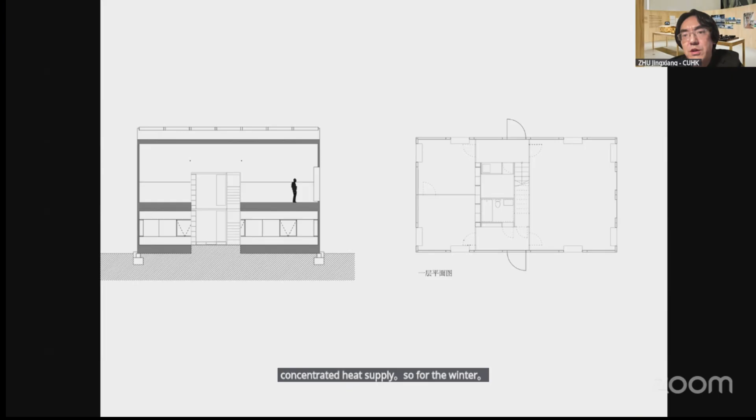This is very important in winter because Suzhou is located in a very special climatic zone, not similar to Bangladesh; even Europe doesn't have it. We call this a hot summer, cold winter region. That area has no concentrated heat supply, so in winter it's super cold, minus 4 or 5 degrees, without a heating system. So we have to guarantee the whole building works very well passively, which means even without much internal heating, the building can still resist the temperature fluctuation.

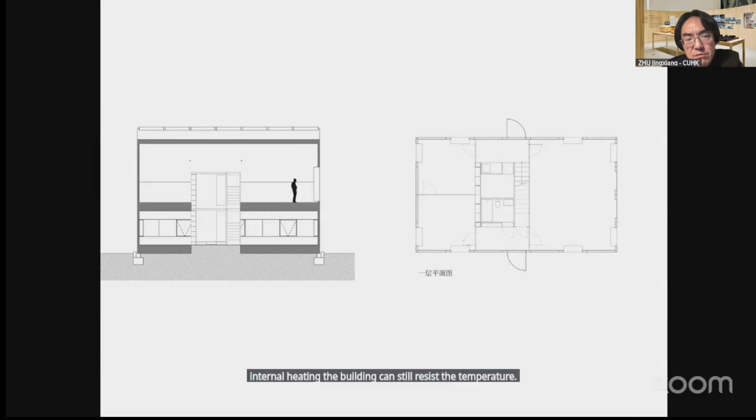So we designed a sandwich system, which means we have cladding, we have thermal insulation, we have fireproofing elements. We hide all the structure in between, so we are not exposing the high-density skeleton to the climatic shock. Inside, we have very basic, beautiful ornaments. For example, we use diffuse light, so it's very warm in daytime and also in the evening time. We have a huge window facing the village and can overview the beautiful sunset.

And even for the cladding, we made a very tricky solution. In the morning, when the sun rises, the air inside the cavity behind the cladding will be heated up, and it will flow to the upper level. And we designed a series of operable panels. So we teach the user in which situation you should open them and allow the warm air coming in. But in the summertime, you should always close them and not allow the heated air to enter the space. So this one was very effective.

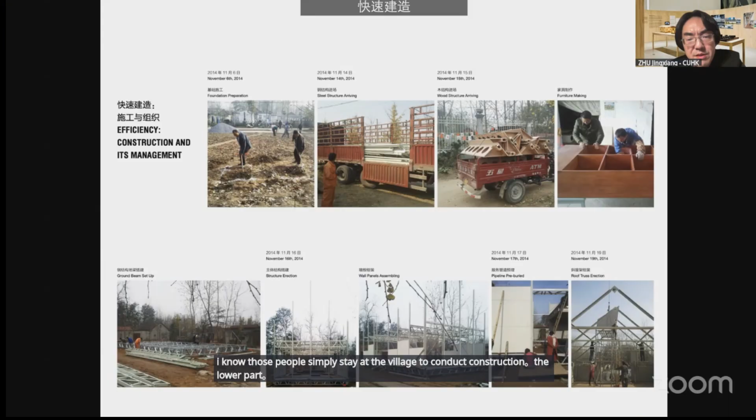So the first part is about how we organized local farmers, peasants, or those people who simply stay in the village to conduct construction. The lower part is about the assembly of the skeleton, and the upper row is about the erection of the skeleton and the internal insulation panels. The lower part is about the outside cladding after we install the waterproofing membrane material.

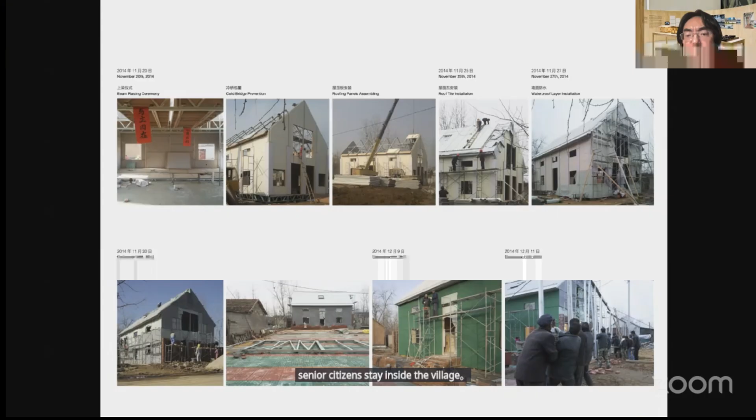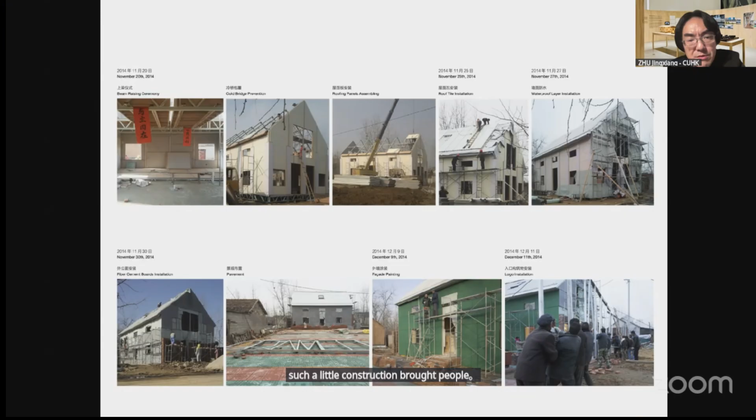So the bottom right photo is very impressive because we organized all the senior citizens staying in the village, because normally in wintertime they do not have any job. They can do nothing. They cannot go outside to earn money. So such a little construction brought people together and delivered funds to them. So this is a collection of all the workers from the village.

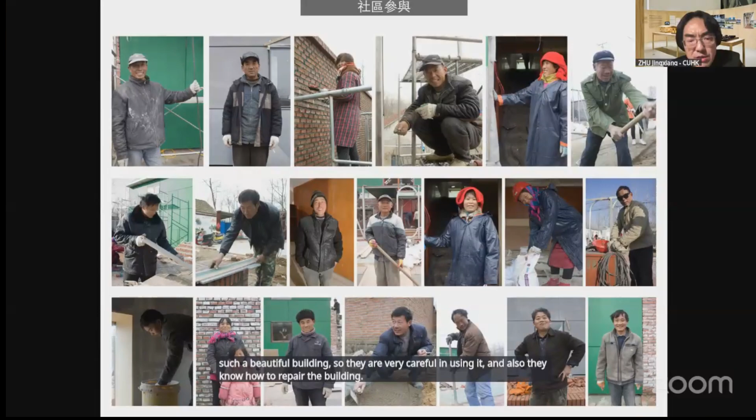And because this is a building built by themselves, they feel an emotional bond with such a beautiful building. So they are very careful in using it, and they know how to repair the building from the internal part to the external part. So the building has already stood there very well for more than 12 years. And every 3-4 years, we send assistants to check the building, and the situation is quite good.

And in wintertime, the whole village, the women and children, have a place to take a shower inside this very warm space. And this is a monthly meeting, very successfully organized by following the Muhammad Yunus Grameen Bank pattern.

So after this prelude about how I became engaged with Bangladesh, I try to summarize my team's working pattern and how we developed a very special philosophy and methodology from this working pattern. So the first chapter is about from crisis to project. Because we are working inside the university, we are not compelled to solve the problems inside society. We have to foresee some problems and prepare solutions.

And as a university institute, we cannot do large stuff. And we do not have enough manpower. We can only organize a team of 6 to 12 people. So we always ask this kind of question.

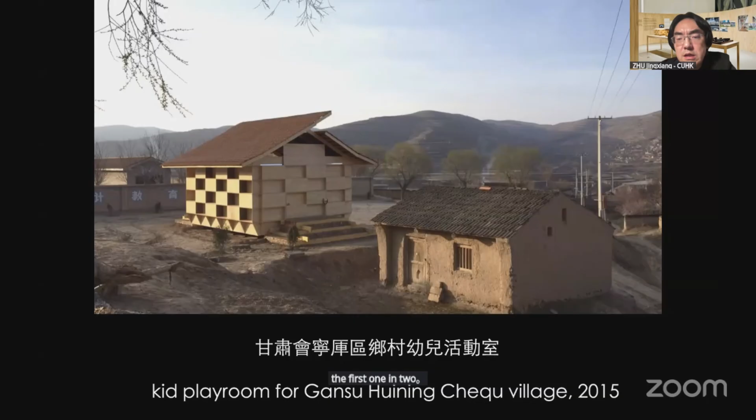So here I mention several very agile projects. The first one: in 2014, a group of NGOs came to me. They said, Professor Zhu, you know, in the past, China had a so-called Hope Project. Many charity groups received money. They tried to build gigantic schools.

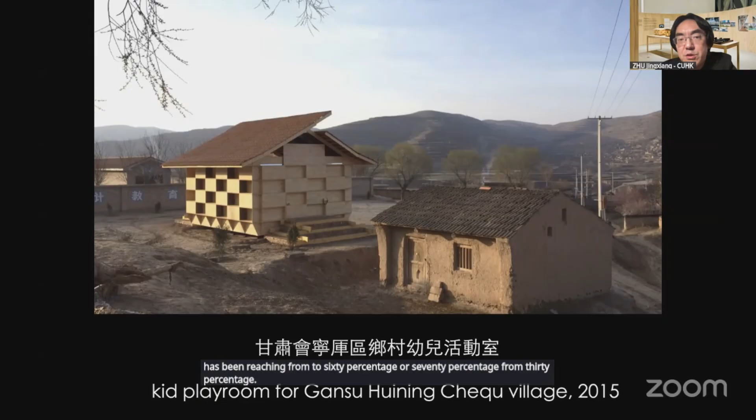But after China entered a period called radical urbanization, so much population moved from rural places to cities. And the urbanization rate has gone from 30% to 60% or 70%. So that's a huge number. So there is a kind of phenomenon. A lot of youngsters, children, kids, were left behind, and they live together with their mother and grandma, grandpa. So they are lacking qualified education preparing them to enter the city environment.

So charity groups are working hard to help them. They often send NGO teachers to the village, but villages often have rammed earth buildings or brick buildings, not very qualified for new types of education. So they asked me, is it possible that we can help if they raise funds for each village? So the budget is super, super low.

I found one very interesting thing. I said, okay, even if the budget is low, it's fine. If this type of work has quantity, we are interested. So from this aspect, we tried to work with them. I asked for very little money, which could cover my assistant's three months of work. Then we tried to deliver the first playroom prototype to them. This was in 2015.

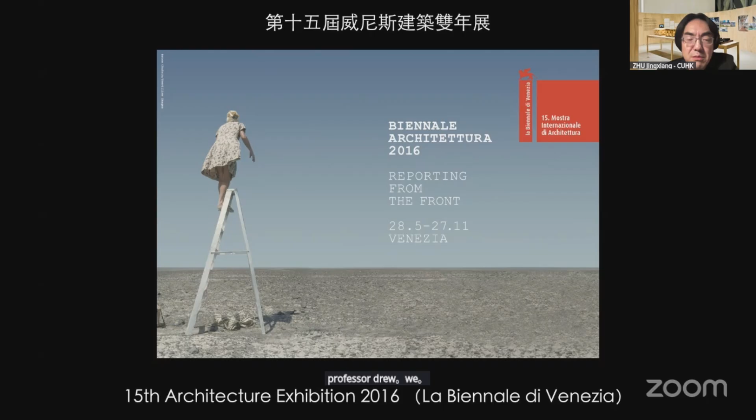So such a story was spread out, and also the next year, before the Spring Festival of China, we were invited by the curator: okay, Professor Zhu, we were impressed by your checkered playroom. Is it possible you participate in this exhibition? We said it's fine. If it's just a model, we can send the model to you, and simply tell us when we need to catch up with the cargo's logistic schedule.

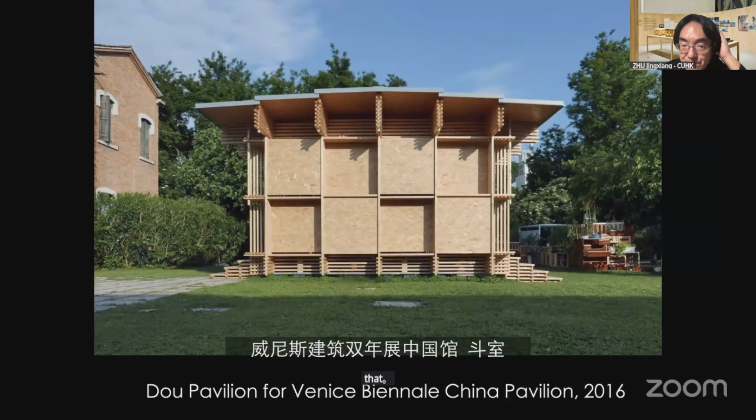But after several days, they asked me, okay, we have a huge garden, and the huge garden needs some gigantic thing. Can you ship one house to Venice? Then I was astonished because there were only 9 days to the Spring Festival. And everybody knows during the Spring Festival, the first 15 days, nobody will work, particularly the factory. So I had to make very special arrangements.

In 9 days, I wrote multiple letters to big companies. Okay, we need such kind of help. Which company can make a decision very quickly? Please sponsor this project. So very luckily, we got a reply in 7 days, and we raised funds, and in the first 15 days, I myself did not spend any holiday, and I made a design. I made some new changes to adapt to the summer climate of Venice.

And after 15 days, workers went back to the factory, and they started to produce, manufacture, and assemble. Then after another 20 days, the building was completed and successfully assembled inside the factory. And we very quickly went there to make a check. After midnight, the check completed, and immediately the building was dismantled and packed to send back to the harbor of Shenzhen to do customs clearance to catch up with cargo boats.

So after another 2 months of transportation, in May, we successfully exhibited this Dou Pavilion for the Venice Biennale. On site, we also used such kind of method. We fold many components, and on site we unfold those components. We link them, and we insert panels to stabilize the whole frames.

And Dou in Chinese first means a measuring tool, but also means a fight or conflict. But sometimes we also use this word to mention fun, like when we call 斗牛, bullfighting, or 斗蛐蛐, letting insects fight against each other to make fun. So later we found this is an interesting meaning with multiple layers, multiple folds. So we try to use this one to emphasize our philosophy. We welcome conflict, we welcome challenges, we welcome crisis. After we can solve it, after we can successfully transform it, it will bring a lot of fun and pleasure to people.

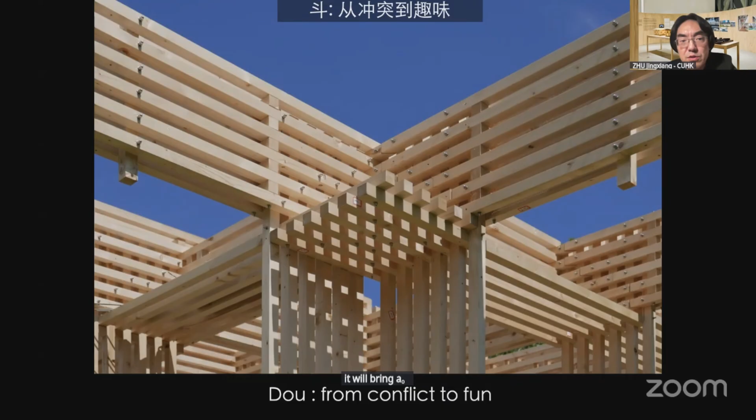So German kids invented their own game because the module is 1.2 meters, and they want to chase each other, to see which one will first successfully climb one round without falling down from the building. A lot of big masters, 2 Pritzker winners were inside, and also the most famous Chinese architect, Ma Qingyun, and the MIT former head and the current Hong Kong U head were inside. So this is another case showing how we deal with exhibition requirements and make the building be generated from another crisis of time.

Next project is in Kenya, and this is called Mathare Beijing School. It is located in Mathare Valley, a kind of informal settlement or slum area. China has a merchandise association continuing to support one of the schools inside this slum area. We were invited to make a little bit more formal building, and finally we delivered this white building.

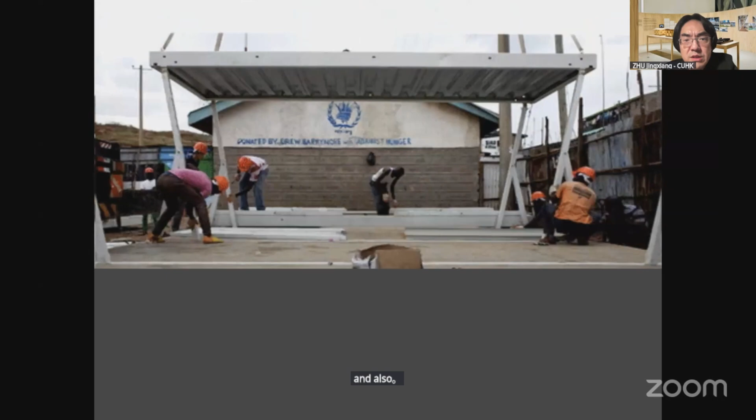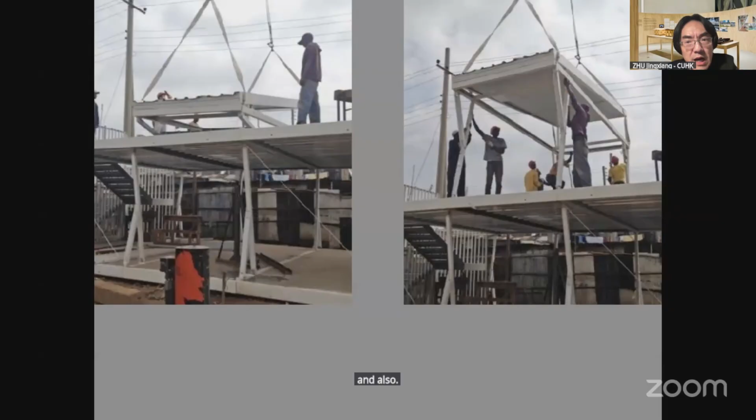And we invented the frame system, and everything can be put inside the container. After they are moved out from the container, we can use one crane to lift up, and local workers only need to plug in those long bolts and fix it. We only hired one group of Chinese workers from the local market who can operate the crane. All other workers we hired from the slum area.

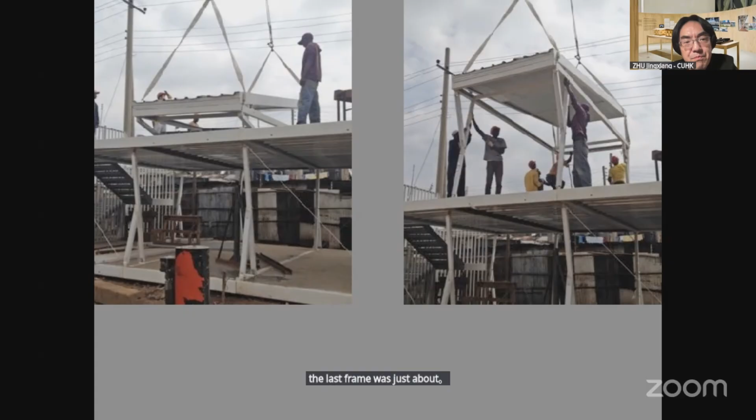And most of them are the parents of the families of the school. So in the beginning, the first erection of the frame took about 2 hours. The last frame was just about 5 to 10 minutes. So in 5 days, we realized this framework.

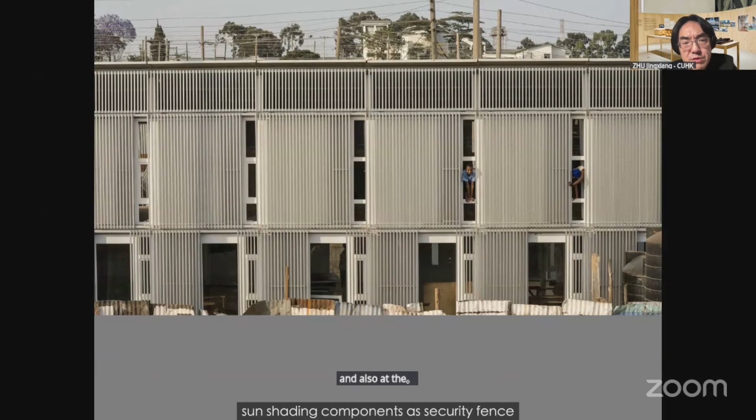And also after the framework was finished, we simply assembled the wall, and also outside the wall, we assembled sun shading components of aluminum. They are also serving as a security fence, and they have a much higher quality, but they also have a similar formal language with the slum areas' informal buildings. So in this way, we can identify this is a well-designed building, but they are not creating segregation inside the neighborhood.

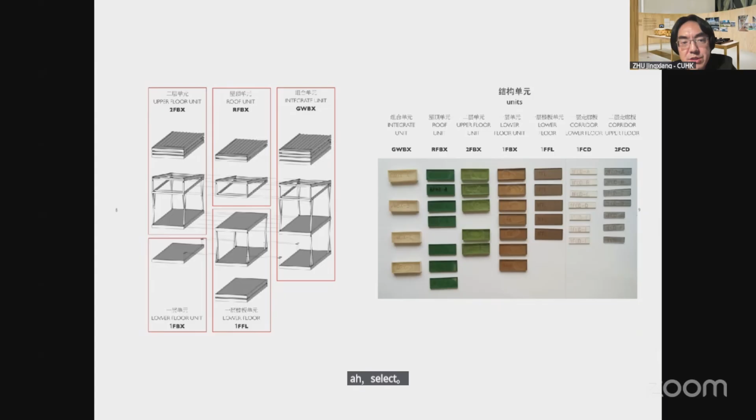And also the left one is 5 types of the module we have designed. Right-hand side is a kind of graphic language we have designed for the local workers, because we can hardly tell them this abstract alphabetical name. We simply let them understand green, like dark green, lighter green, or a brown, or a very light brown color. So they can help us to select which type of components from the heavy piles.

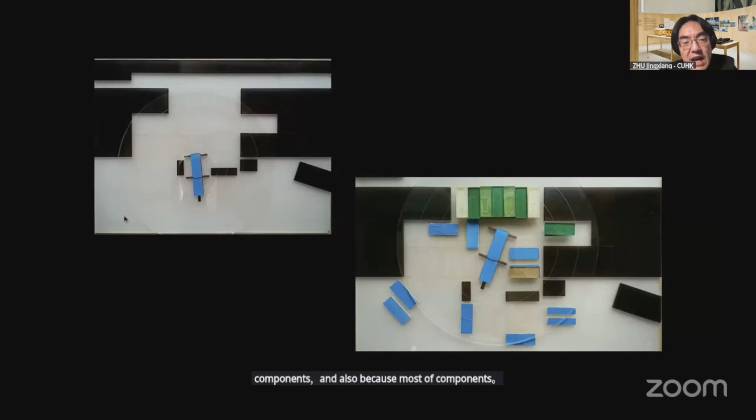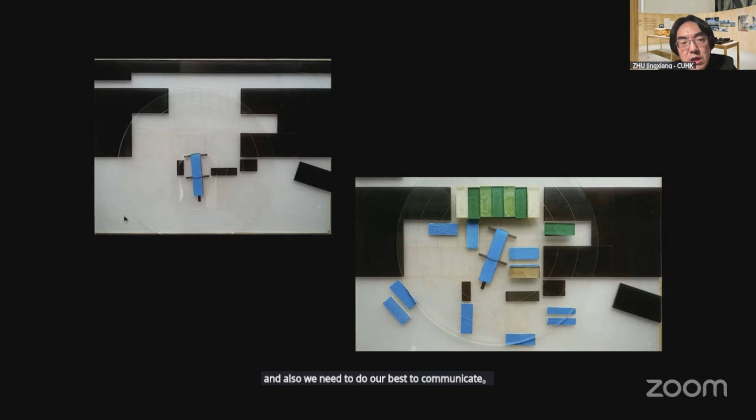And also here, we also have some animation showing we very well planned those kinds of cranes. And also for the crane, there is a formula controlling the arm's cantilever spanning distance with the weight allowed to lift up, right? So we have to follow such kind of formula, and also very carefully distribute those kinds of components. And also because most of the components are relatively heavy, from 200 kilograms to 500 kilograms, we need to do our best to communicate among the team to prevent accidents or disasters happening during the construction.

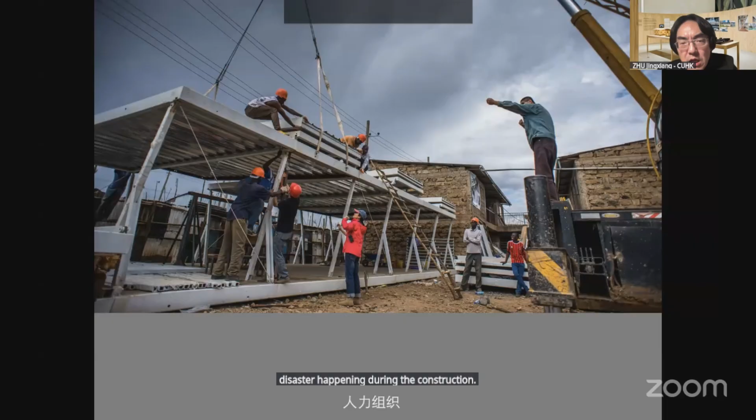So here you can see we also sent 2 people as assistants there. And also a very important lady is the lady in red. She helped us on collecting a lot of on-site information. And she helped the assistant we sent from Hong Kong there to complete the building. And finally, she also used this case in her PhD, mentioning how a group of younger architects managed to contribute something to this slum area.

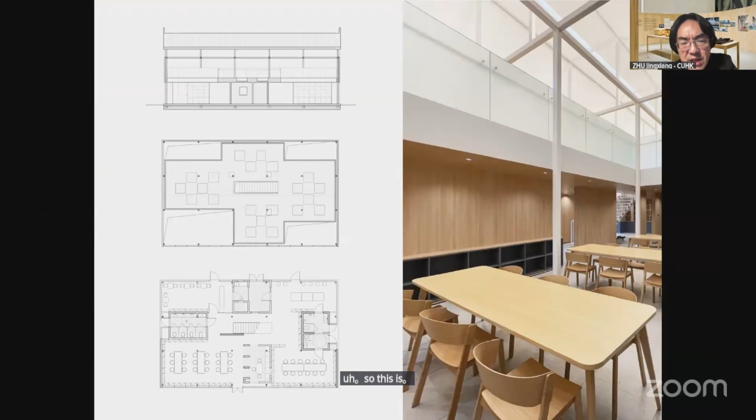And also China made a great urbanization leap forward, and many new towns were constructed in suburban areas. But the government has to deliver, for example, public toilets, garbage stations. So we also got a chance to work with the Henan Xinxiang government, and we wanted to turn the right bottom public toilet into a multiple usage facility. So finally, it was turned into a book house, and in the past, nobody wanted to get closer to the public toilets. At this time, everybody wants to use the bookstore. So this is a plan, section and also internal view. And after you go up to the upper floor, you see such kind of scenario.

So I quickly mentioned these 5 little projects. They are always a kind of response to crisis and special issues, either about the rural educational crisis or education inequality in Kenya or in a metropolitan city like Shenzhen. And sometimes we work with curators' requests to deliver an exhibition pavilion, or we try to enhance our community and turn a not-in-my-backyard facility into a kind of popular device.

But other than that, we also have another phase, because we don't just want to do one project after another project, and the whole universe needs a lot of houses. We can never fulfill such kind of need. As a university teacher, we also want to find a better way to turn a project into a qualified product. So there is a difference between project and product.

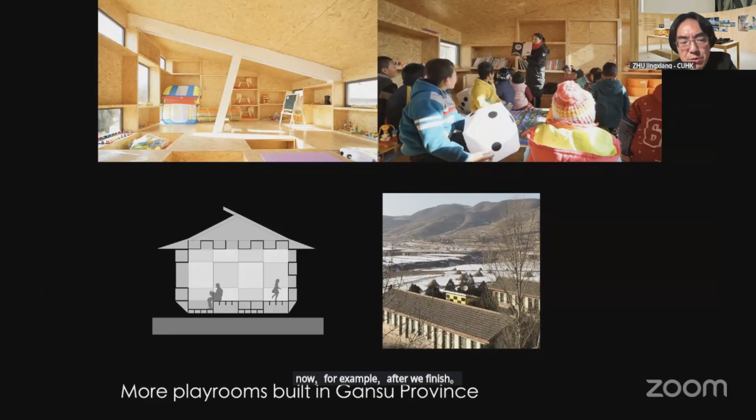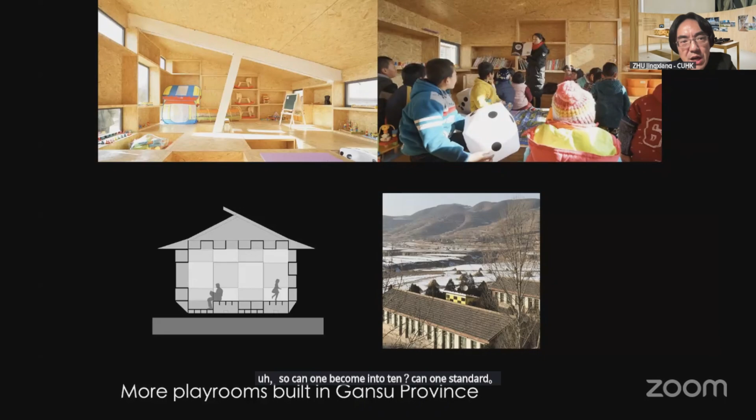Now, for example, after we finished the checker playroom, immediately the NGO asked us, okay, Professor Zhu, the first year we need 10. And different villages have different sizes, different populations. So can one become 10? Can one standard one become other types? So very quickly, we need to optimize the building design.

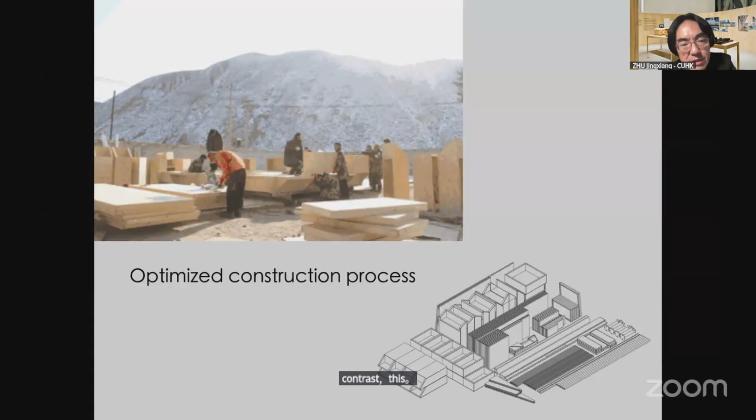And from 7 days, finally we compress this into 3 days: 1 day for foundation, 1 day for assembly, and 1 day for finishing. Everything can be packed into a truck.

And because we can hardly handle a large quantity of ordering, we work with a factory. We help the factory select the machine and select the material supplier, and we even help them build up a tiny engineering team, which gives them the different certificates that NGOs require them to prepare.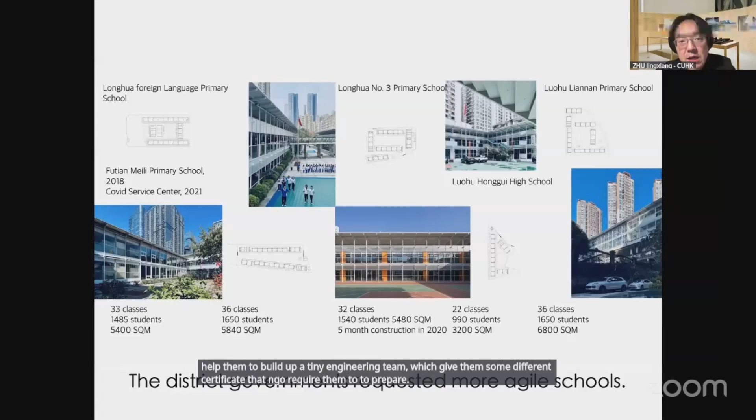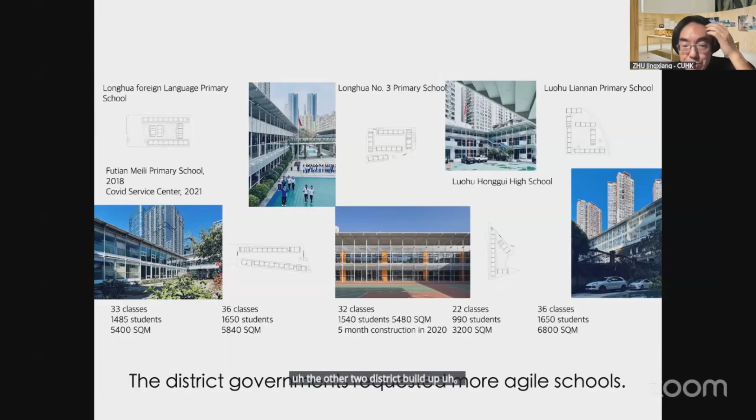With this factory's support, we also dare to fulfill other types of requirements from other districts in Shenzhen. After they finished the first school, everybody felt this might be an interesting solution. Each district needs certain numbers of new schools, so we took this as an opportunity and helped the other 2 districts build up the other 4 schools in 3 years' time.

Definitely, if we are able to turn a project into a product, we have to put a lot of energy into the innovation of system and joints. So here we use a very special type of framework, and also a platform construction method.

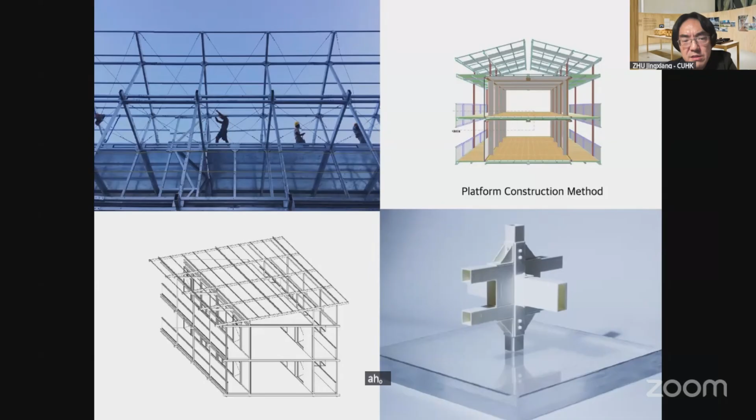This system allows manual construction. Even without a crane, this school can be built. The joint is a little bit special, and Arup gave us third-party final check and final approval.

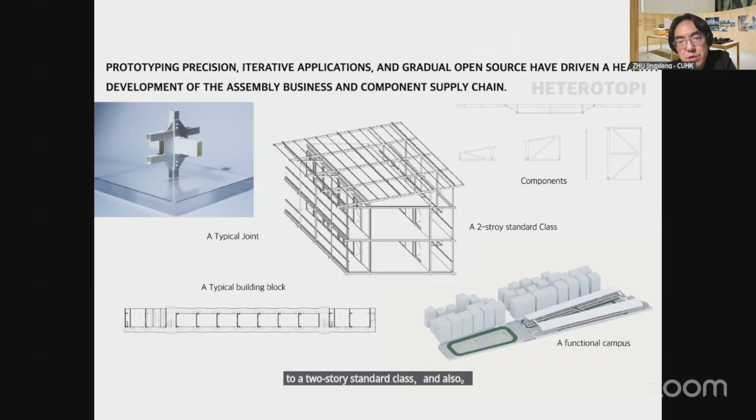And also we have to design everything with a system concept, from type of joint to a two-story standard class, and components have been reduced to a minimal number, and we can build a typical building block, and from building blocks we can build a functional campus.

So by looking at this very detailed drawing, you can see it's one type of constructional system but with a different spatial arrangement. For example, on the right-hand side, it's classroom, so we have a double-loaded corridor on both sides of the classroom. For kids, this is fantastic because you can slip from one classroom and enter into another, and you can walk around and have a very beautiful differentiated view on left and right.

With the same type of grid, we are able to adapt into very different functional usage. For example, on the left-hand side, you see how we arrange office, how we arrange a large meeting space, how we arrange a toilet. Even for toilet, we design 3 rows: one for male, one for girl, and the third one either for storage or for teacher, or for special gender, just in case there is a gender imbalance situation.

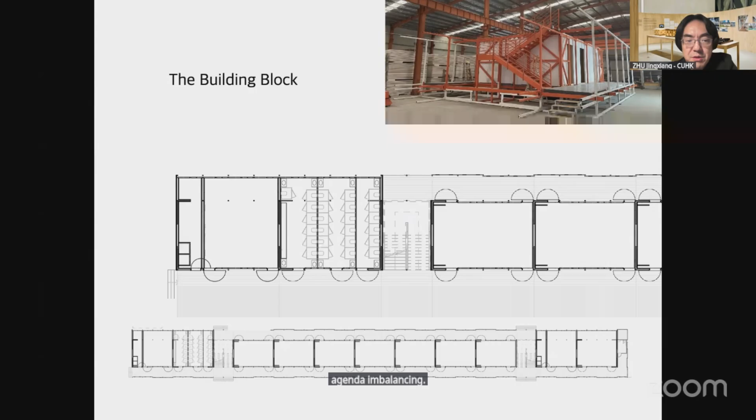Because we push this to the extreme, we just use a skeleton to do the expression. A lot of people felt, oh, this really revives our traditional timber construction heritage. And because the steel has no on-site welding, the galvanized steel with a coating is very, very durable.

So to make a summary, we are always very keen to see our projects being duplicated or requested by people for larger quantity. We have several methods, either through mass manufacturing or through open source manufacturing. For example, the Luohu school is not manufactured by the factory we are familiar with. The third method is always using one good prototype to do little variation, and we can always adapt into the change.

The last part is about the Agile methodology, because we can deliver things in a very quick way, so there must be some method. First method is about a very good spatial organization, and use the construction to determine the material, and use material to determine the structure. So it's no more a very modern way, but it's a very classic way.

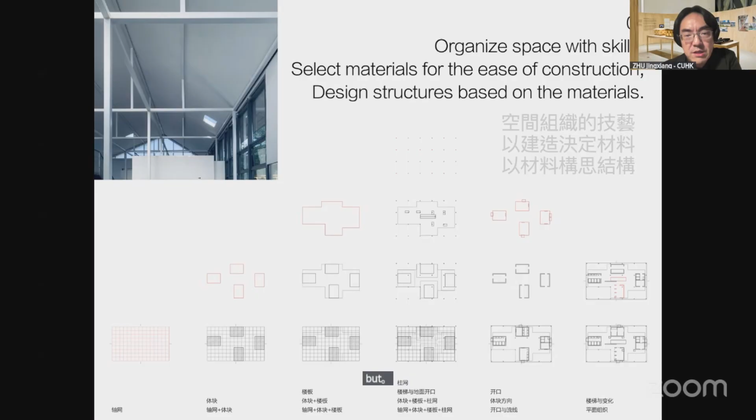For example, the left one, we decide to use slender or slim components which can be produced by laser cutting machine, so they are either 80 by 80 or 100 by 100 millimeter. It's very slender, and based on this material we decide how tall we can build, and what is the largest span without adding some truss or additional beam. So based on this grid, we build the whole pavilion.

And the second is about offsite fabrication. We are very careful on knowing the logistic condition and transportation tool, either made by animal or in the future maybe by drone.

Also our consideration: yesterday we just had a meeting with a Shenzhen company. We use a drone to aid the transportation of the concrete building. We are very curious about their story, so we interview them and try to accumulate certain knowledge.

The third thing is about lightweight construction. Normal building is about 1.5 to 2 tons per square meter for concrete buildings. So we try to push this to another direction.

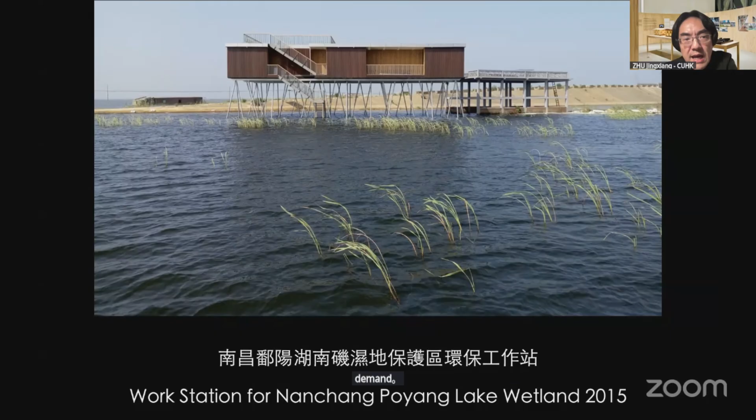This is a wetland workstation. This one may be very close to the Bangladesh demand. Annual flooding is about 3-4 meters of level difference. Any type of heavy construction will finally be destroyed by the wave and the flood.

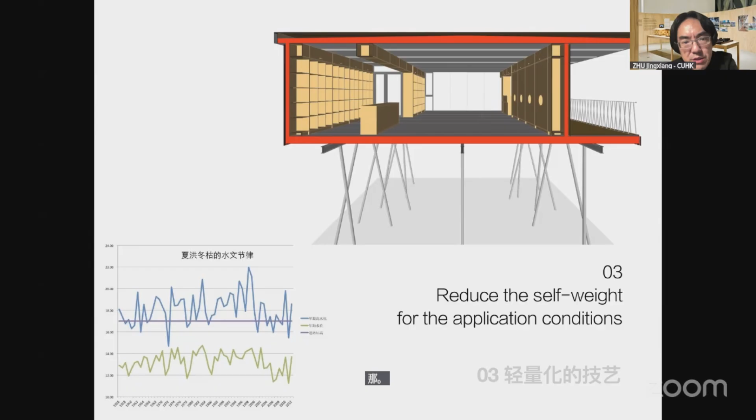So we designed a super lightweight structure - only 200 kilograms per square meter, but with a loading capacity of 350 kilograms per square meter. We also elevate everything and use furniture to do the structure. After we finish, the space is beautiful, but you're not allowed to move our furniture because they are supports.

Annual flooding is more or less like this, and this building has already survived there for another 10 years. During the dry season, it's like this.

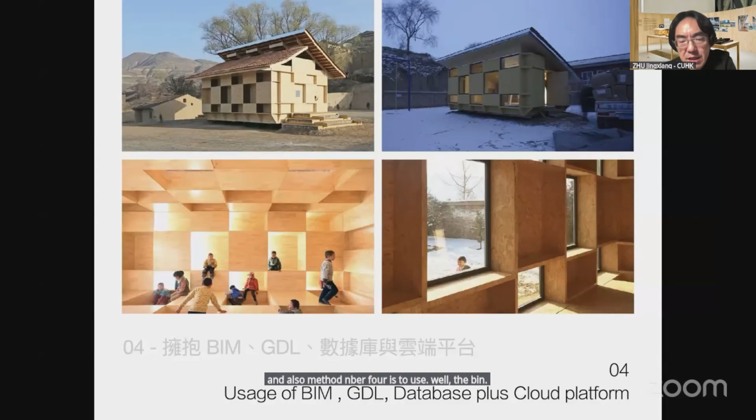Method number 4 is to use BIM, the GDL database plus cloud platform, for almost all those kinds of duplicable projects. So we are using BIM - we particularly like ArchiCAD, developed by a Hungarian company with a similar historical length to Apple.

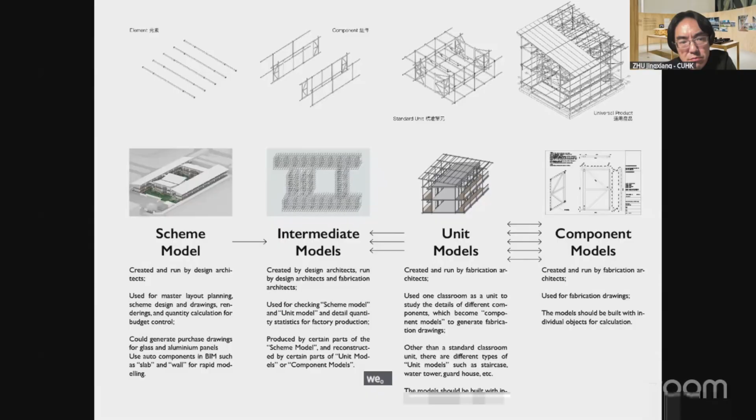Even for such a complicated transitional school, we just need the modeling of 2 files. We can control everything from the schematic design to the shop drawings. We also encourage assistants to learn GDL scripting.

For example, for the checker playroom, we need a Mondrian composition where all the components are different, so we write a script to describe this.

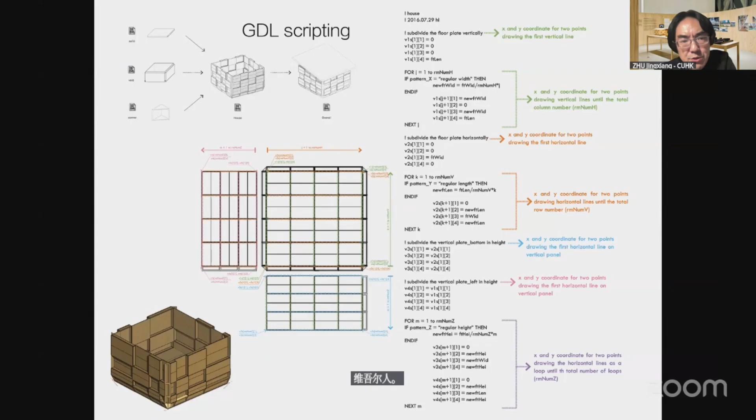Also, a database is necessary for us to understand how many we have built. For example, the checker playroom - we've built 200, and we track which type of climatic area they're located in, how well they are used, what is the actual lifespan, and in which kind of situations they are normally used, whether clients want to relocate them. All those things allow us to link with the object we have created.

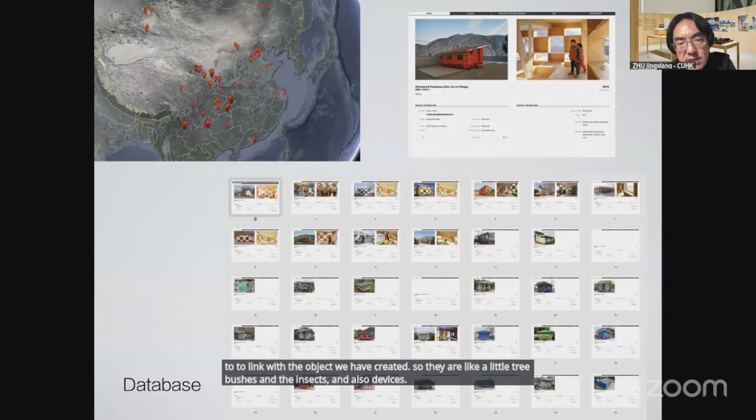Also, we work with a cloud platform. For example, a Caribbean Ocean project - we couldn't go there because of COVID, so we built up a cloud platform to allow a Taiwan team to help with the building. We shared the same ArchiCAD model, they followed our instructions, and successfully built this after 3 months of work.

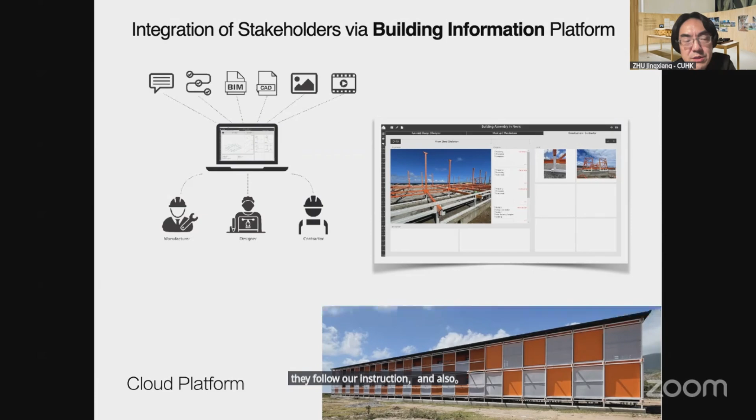Number 5 is about agile supply, which should be developed together with agile development. NGOs are the most effective social organizations, and we encountered this kind of opportunity with social entrepreneurs who set up a company to address the issue of youth unemployment.

So we gave them a kind of prototype and taught them how to build. They can go from fundraising to the final delivery with just a little help from the factory.

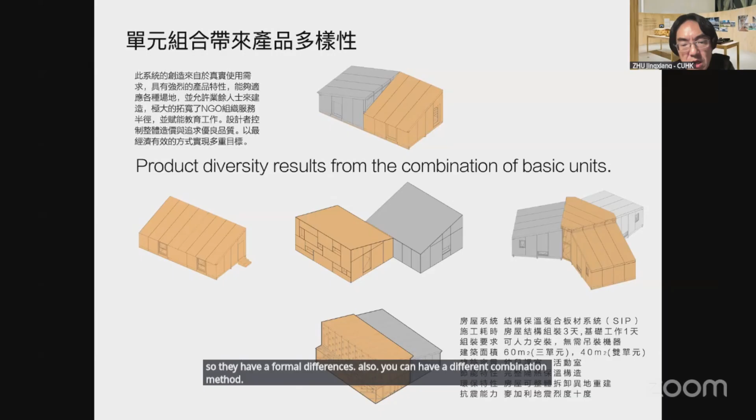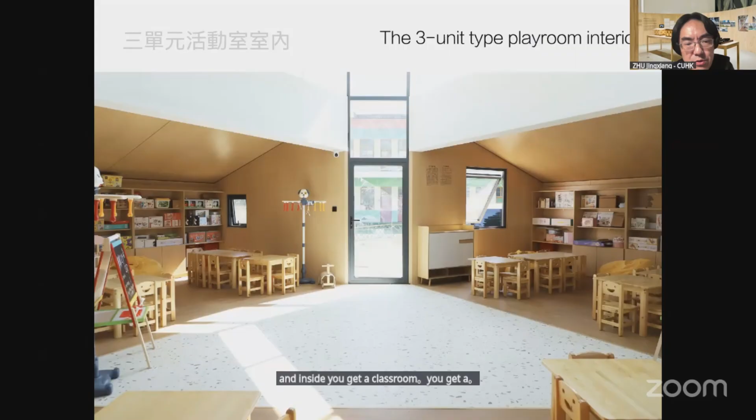If you only need a tiny building, you use the left one; if you need a gigantic one, you use the right-hand side one. So they have formal differences, and you can have different combination methods - this is a 1-unit type, 2-unit type, another 2-unit type, and a 3-unit type. Inside, you get a classroom, a theater, a social community center.

We even work with some big sponsors of a top sports game. After they finish their exhibition booth construction, we can deliver the exhibition booth to 2 schools as a separate unit type.

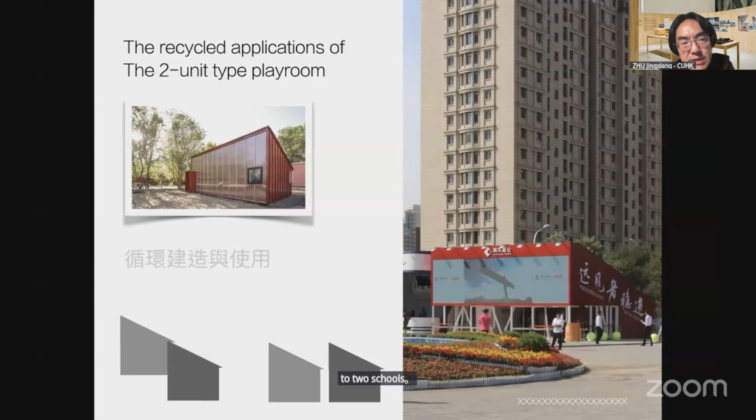So with this kind of interesting product empowerment, this 4-person NGO raised 4 million RMB in 3 years, completed 20 construction projects covering 9 provinces, offered meaningful jobs for 10 young teachers, and helped about 800 kids.

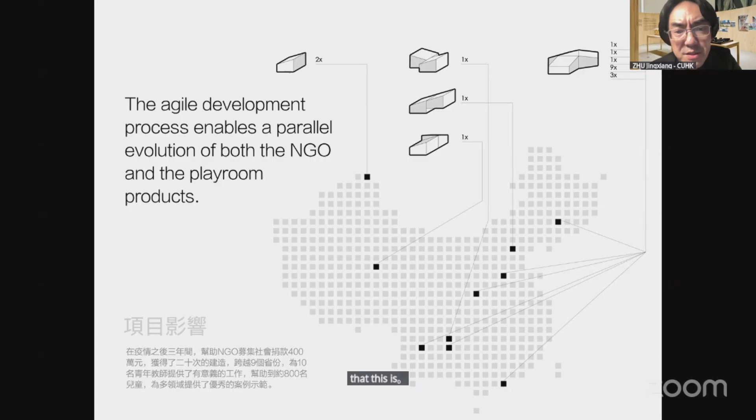This is a very good business school example. So as a summary, I think we need to collect these different skills before we can really reach this kind of agile supply. This is the last slide. Thank you.